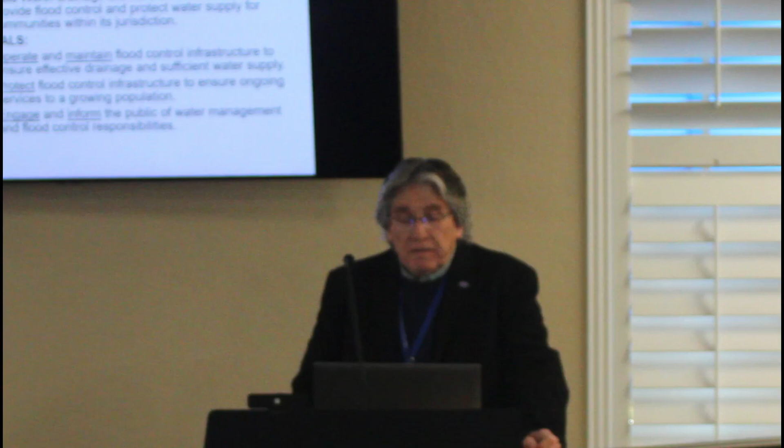In 2024, the state legislature required special districts to establish goals and performance objectives, and the board adopted these goals and objectives in October 2024. An annual report is required to be published on the district's website by December 1 of each year. Our first one will be this year, this coming December.

Our mission is pretty simple. We're a single-purpose drainage district, and the core mission is to provide flood control and protect the water supply for communities within its jurisdiction. Our goals are to operate and maintain flood control infrastructure and ensure effective drainage and sufficient water supply. We protect flood control infrastructure to ensure ongoing services to a growing population, and engage and inform the public of water management and flood control responsibilities.

The outline of this presentation: we're going to talk about weather and water management over the last year, key capital projects, and we've got some pretty significant capital projects that have been going on for a while we're going to discuss, including the canal rehabilitation program. We also have our normal maintenance activities, which is a job in and of itself that is very significant, plus a regulatory program and administrative functions.

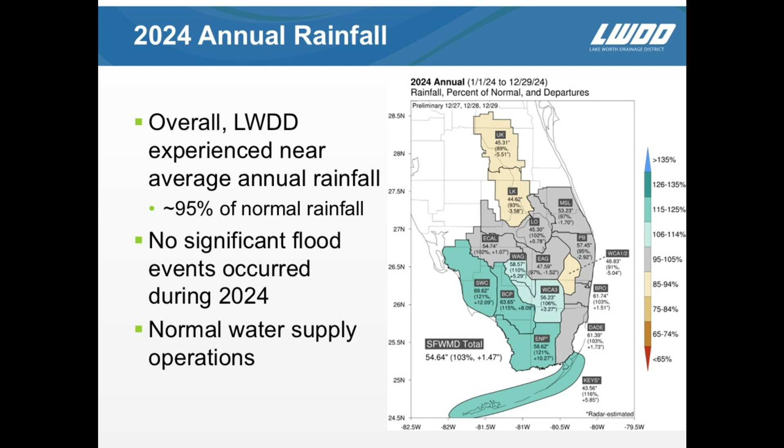With regard to weather, overall Lake Worth Drainage District experienced near average annual rainfall. We got about 95% of our normal rainfall, about 57 inches, which averages around 60. No significant flood events occurred. We had some close calls, but we were lucky this year. We pretty much had normal water supply operations, but that looks like it's going to change, and I'll talk to you about that in a little bit.

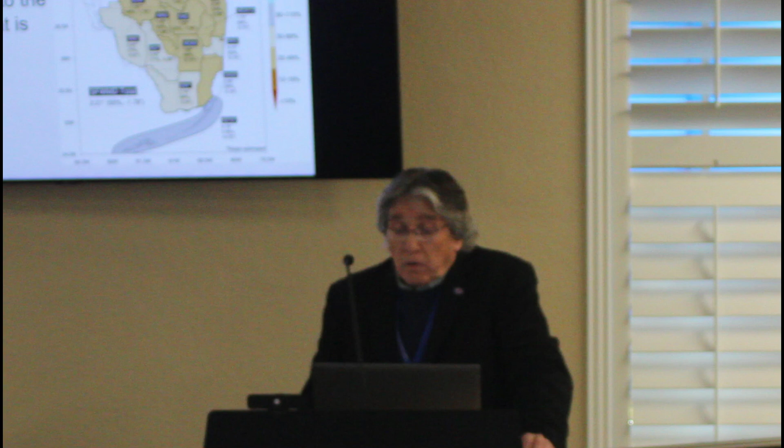In the fall of 2024, we experienced significantly below average rainfall, and this is likely due to the La Nina event occurring out in the equatorial Pacific that has an effect on dry season weather here in South Florida. So far we're probably at 30% of average rainfall, and that's left us in a situation where we're on the edge of a drought.

This is the U.S. Drought Monitor published by the National Oceanic and Atmospheric Administration. It pretty much has the whole state under abnormally dry conditions, with a couple of spots in the Panhandle in North Florida that are in a moderate drought. We expect that may continue, if not worsen, as we move forward.

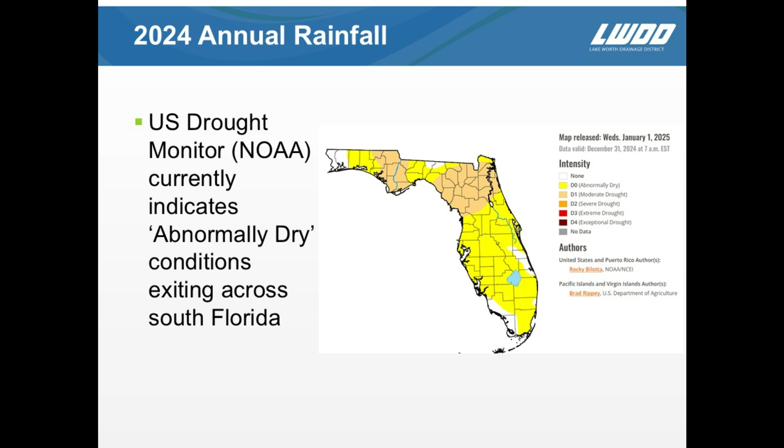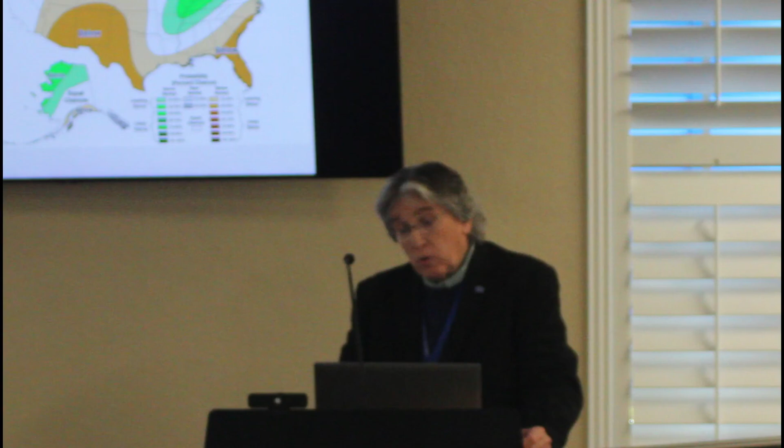The reason for that is when you look at the projections for this La Nina event that we're in, it's anticipated we're going to see significantly below average rainfall as we move into the spring of 2025. So it's not likely to get better than the current condition, and it's probably more likely it's going to get worse. I show this just to give you a sense of what we've done water-wise over the year.

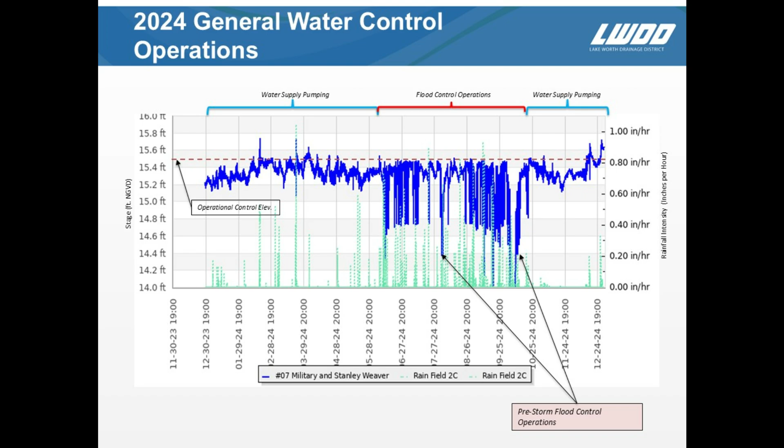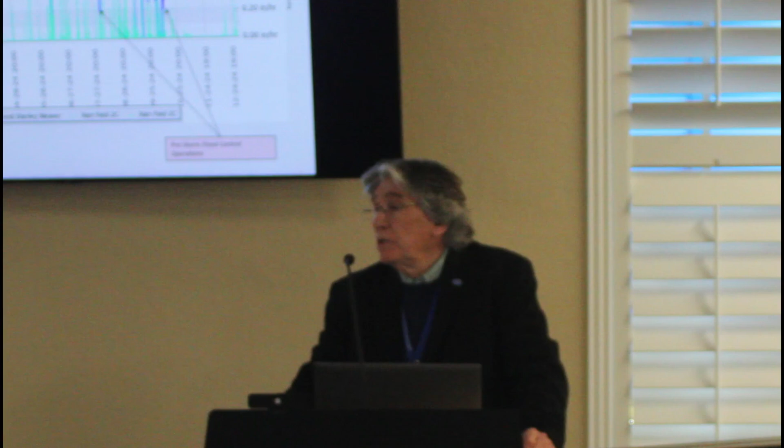We had a couple of pre-storm drawdowns. I'll talk about one of those in a few minutes, in anticipation of the storm, kind of bringing the system down to increase storage. Then when the rain stopped, around the beginning-middle of October, we went back to pumping operations. Because of this indication that it's going to get dry and may get drier, we've been pushing a little harder to push water levels above what our normal control elevation is.

Obviously, Lake Okeechobee plays a big part in our dry season operations. As we've talked about for the past 3 years, the new regulation schedule for Lake Okeechobee is now official and in place. The colonel, or the general, in Atlanta signed it about the middle part of last year, and the Corps of Engineers is currently operating under that schedule.

The current stage is around 14.93 NGVD. That's a great place to be at the end of the wet season as you prepare for the upcoming dry season. The problem is it's been high for several years. The Corps of Engineers has been concerned that that's going to have impacts to lake littoral zone vegetation, and they've initiated what they call a recovery protocol, which is intended to push water out of the lake in the dry season in order to bring the lake down quickly before the spawning season in the estuaries.

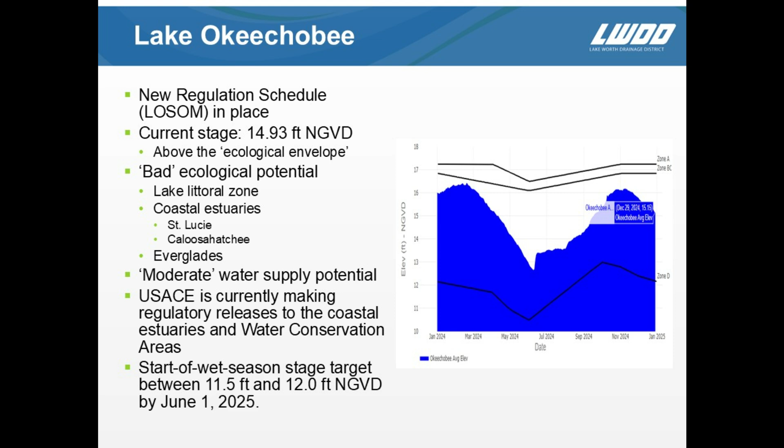Because when you let the water out of the lake, it goes into the estuaries and impacts those coastal ecosystems. So they want to get that done early so that when the spring recruitment for fisheries and oysters and things like that happens, they can stop those releases.

Problem is, their goal is to bring the lake down to between 11.5 and 12.0 feet NGVD. At 10 feet NGVD, you can no longer get water out of the lake. So if they stop at 11.5, they've got 1.5 feet before we literally run out of water from Lake Okeechobee. So it's kind of a precarious spot.

If we're lucky and rain starts on June 1, maybe it's not a problem. But it's a bit of rolling the dice, I guess I'd call it, with the risk that if the dry season extends further into June or maybe July, we might have a problem with water from Lake Okeechobee.

Now we'll talk about Hurricane Milton, which was probably our closest call this year for a major rain event. Early forecasts predicted significant rainfall, maybe even a historic rain event. And there were areas in the state that did get historic rain from Milton, as well as other parts of the country.

We initiated a pre-storm canal drawdown on October 3rd and authorized the communities that had operable structures that they could open those structures in advance of the storm.

We maintain canal elevations, as I showed you earlier, at or below the design operational stage. We maintain canal elevations through the storm to avoid submergence impacts to the communities. In other words, if the water's too high, communities can't get water out of their lake system.

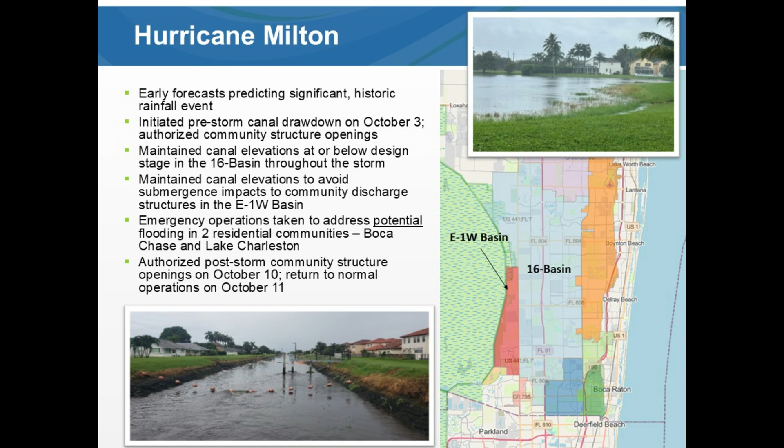And we authorized post-storm community structure openings on October 10th to discharge any of the water that we got from the rain event, once the storm had passed.

I'm not going to go into detail on this, but last year we unveiled our water management dashboard, and this is from our SCADA system and from all our remote monitors, remote rain gauges. We now have a way to look in real time at what's going on in the system.

And for events like Milton, it's a great way to forensically look back at what we did and say, well, did we do a good job? Could we do something better?

Without going into detail, these little bumps here are rainfall for each day during Milton. These blue lines are the normal operating range. These series of lines here are all water levels in the 16 basin, and basically it showed we never went above our control elevation as we went through the storm.

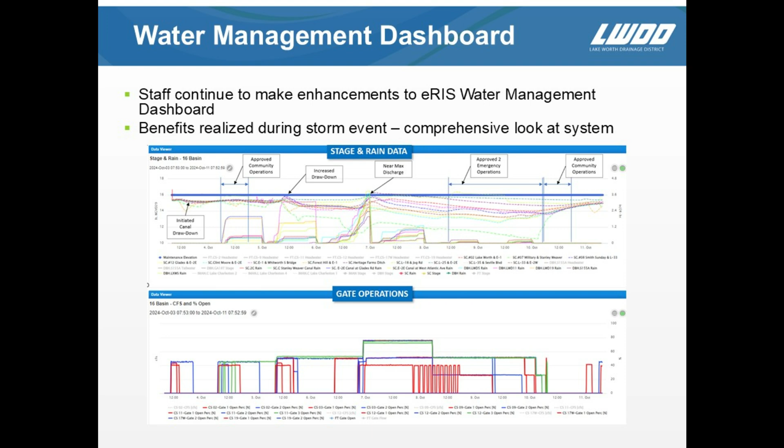And we can kind of say, well, what were we doing when the communities were discharging? What were we doing at the peak of the storm? And these traces down here are the actual gate openings. Each individual gate we can trace exactly when it opened, how long it stayed open, how wide it was open, how much water was flowing through it, and when it closed.

So this is a great tool we use in real time, and we can use after the storm to explain to people what we did, how we did it, and why we did it.

We had another milestone this last year, and that was the C51 Phase 1 reservoir became operational. And we received the first request to pass water from a reservoir out there on 20 Mile Bend into the C51.

We picked it up from the C51, pushed it through our system down to the Hillsborough Canal, where Broward County could pump water from the Hillsborough into their canal system to meet that need.

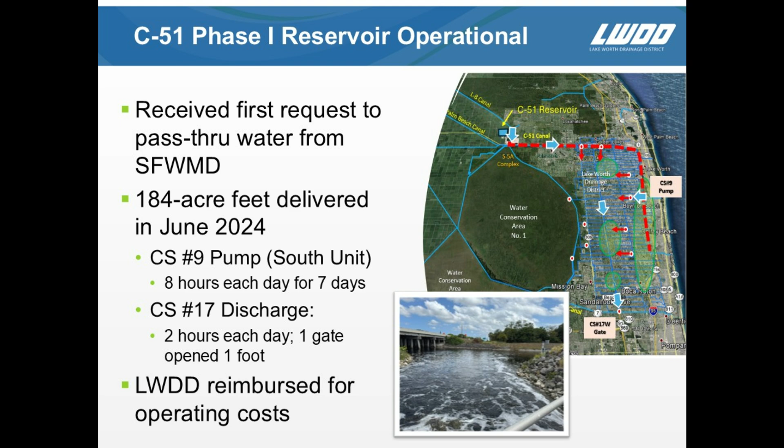So we pumped in around 184 acre-feet, which wasn't a lot. It's Control 9. We did it 8 hours a day for 7 days, and then we discharged it at Control Structure 17, 2 hours a day. We had one gate open 1 foot, and that's the water coming out of the gate.

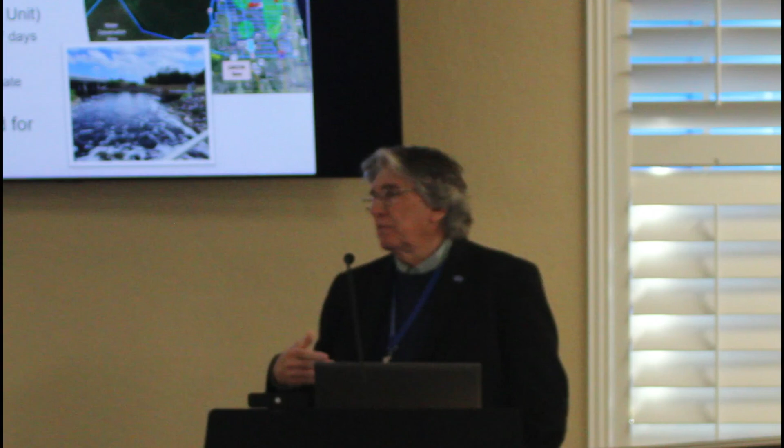So it wasn't a lot of water, but it was important, because this agency worked with the Water Management District for the better part of 20 years implementing this system. We played a critical part in moving water from one point to the other, and this was the first time that it actually did its job.

The other thing we've been working on, and we're almost done, is the completion of our comprehensive hydrologic modeling effort. Basically, this map is a very complicated way of saying we model the entire water movement structure within our district.

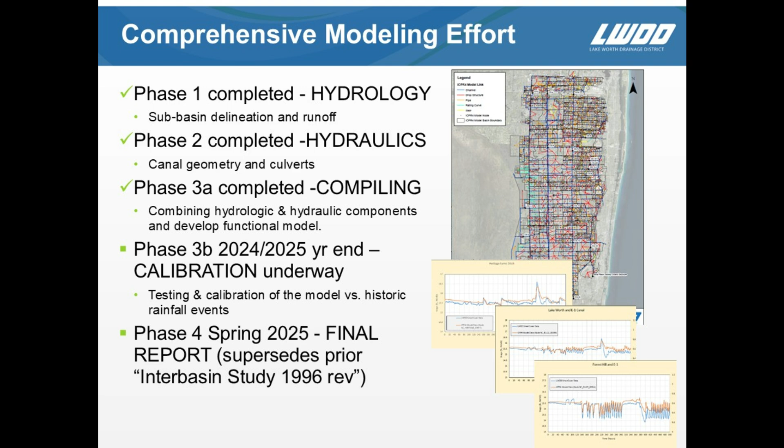We completed the hydrology in phase 1, hydraulics in phase 2. We compiled it so now there's a functional hydrologic model, and we're finishing up the calibration, which proves the model represents what actually happens in the real world. The goal is this spring we issue a final report that will supersede the previous study, which is now 30 years old. We'll have a state-of-the-art interbasin study to use as we're permitting, regulating, and operating the future of this system.

Another big milestone we've talked about for the better part of a decade: refurbishment of Control Structure 9. We were going to replace it, but the cost got too crazy, so we decided to do a major refurbishment instead. That's taken a series of years, and the last step was to replace the radial gates you see in the photograph, which we did in January of 2024.

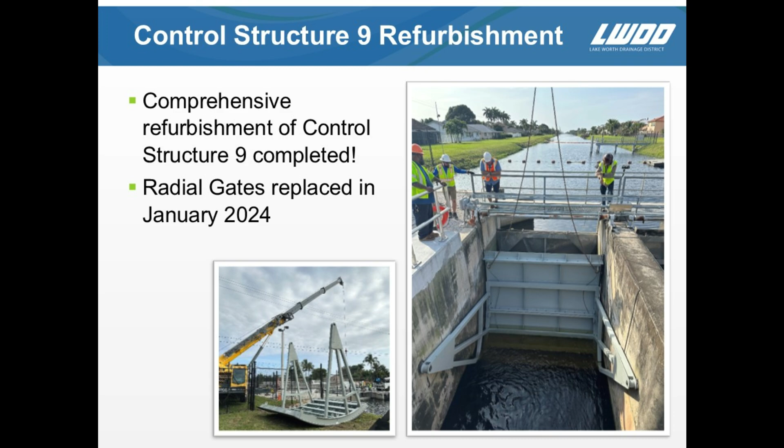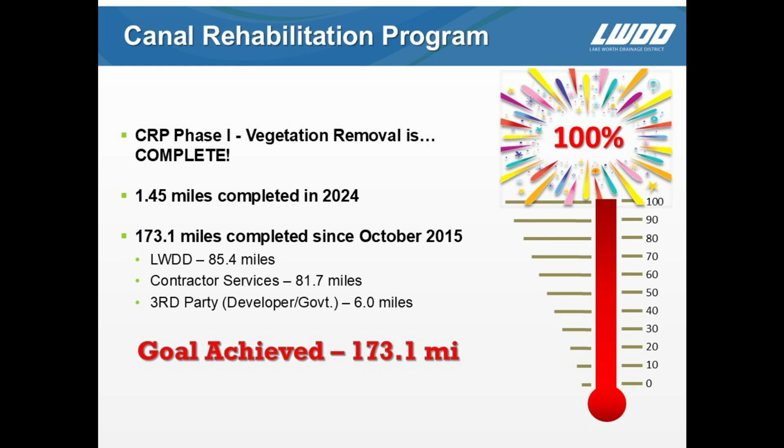Remember the presentation I gave back in 2015? I estimated it would take 20 years to do it, and we did it in half the time, thanks to the board for funding contractor services to help us double that effort. Now we're safe from having trees falling and collapsing from our property into our canals and impacting flow.

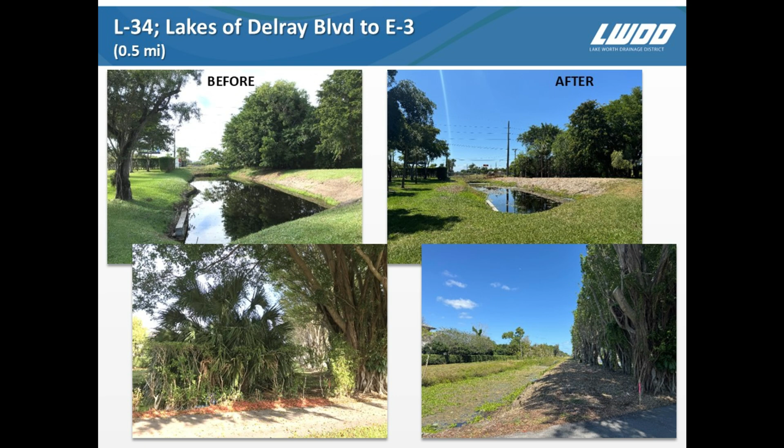Here are some before and afters. This is Lakes of Delray, L34. You can see before, we had heavy vegetation that was threatening - if a wind came, that tree could fall over and block the canal. That's been cleaned, slopes have been dressed. Similar situation here, you can see the stake is our boundary line, so we'll clean that up.

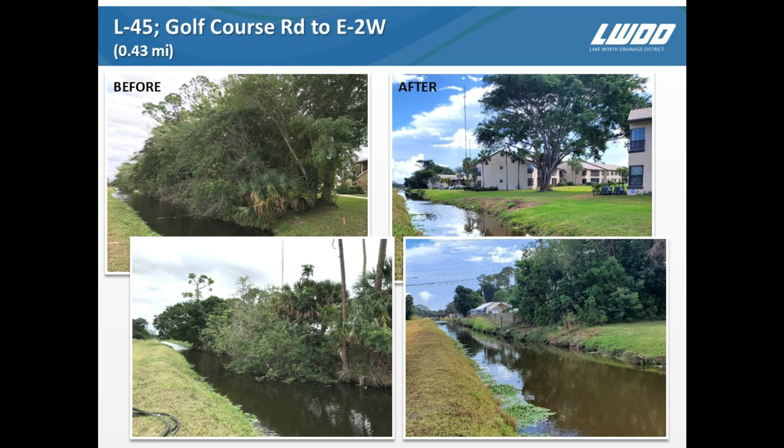This is L45, similar situation - one bank was just totally overgrown. Now that's clear. We're getting ready to address these canal slopes and reconstruct the design section. This was next to the Pine Jog Environmental Center, which we've talked a lot about. We had a berm there that we had to remove, but first we had to get the vegetation down.

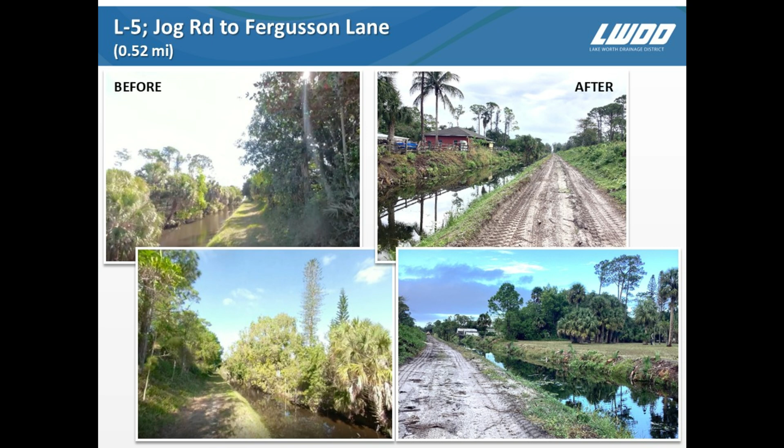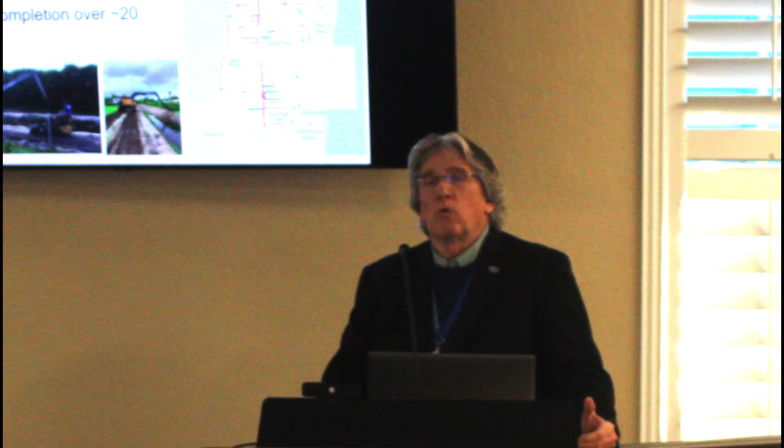That's been completed. So now we focus on the maintenance restoration program, called the MRP. Some people refer to it as CRP Phase 2. Basically, now that we've got the trees out of the way, we've got to restore the canal bank and restore the canal section.

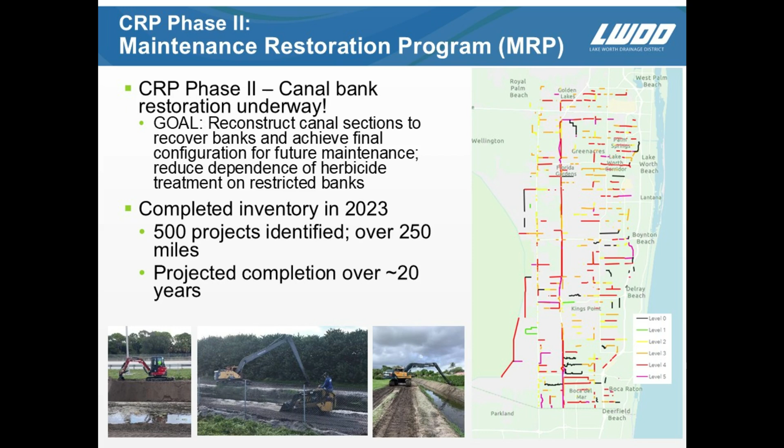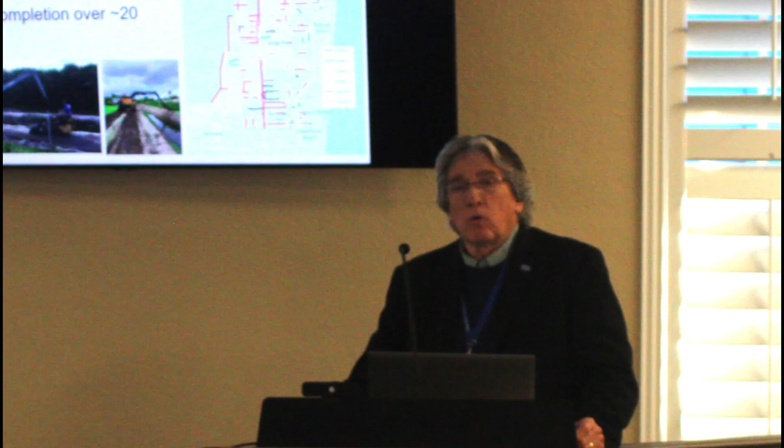We completed the inventory in 2023. We've identified 500 projects encompassing about 250 miles, and we expect this project will take 20 years because it's slow and laborious - you've got a big machine, you move a lot of dirt, and it takes a fair amount of time.

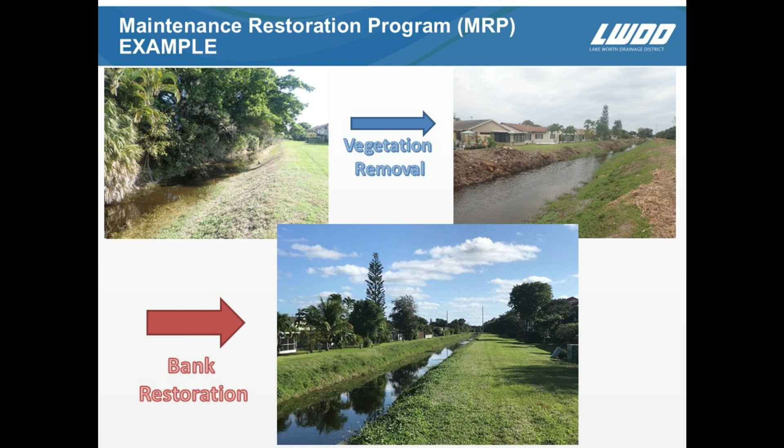To give you an example, this is 10 years ago. The canals looked like this, where one side was completely inaccessible and the risk of trees falling in the canal was pretty high. We went through the CRP, removed that vegetation, and it looked like this afterwards - but still, the canal banks are eroded and the channels are in bad shape. The next step, bank restoration, is to come in and dress it up to look like the canals that were intended in 1915 when the system was conceptualized.

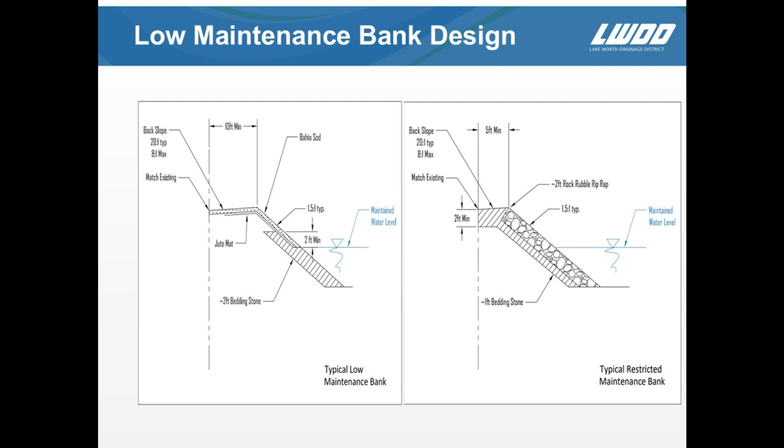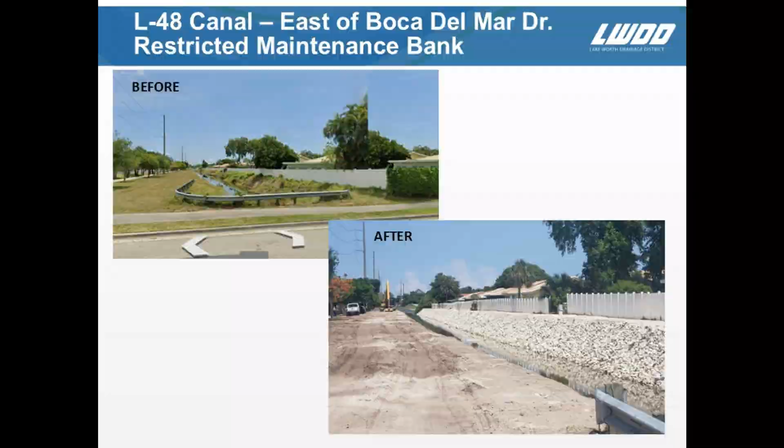We have a timeline. Tony Lacasas has come up with the outline of a program - these are the first few projects we're going to do. But again, this goes out to 2045 for ultimate completion. So it's a big job, and it's going to take a while.

Well, we cleared the low maintenance side, right? They don't have trees on them anymore. But we've got to maintain it, otherwise 10 years from now we're going to wake up and it's going to look just like it did in 2015.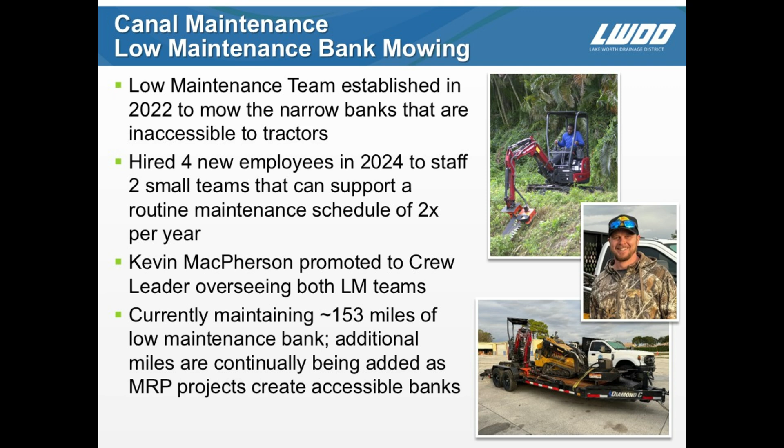So we've established a low-maintenance team to mow the narrow banks, and you need specialized equipment to operate with those narrow land margins. We hired 4 new employees in 2024 to staff 2 small teams that can support routine year-round maintenance, twice a year for each section with regard to vegetation maintenance, etc. Kevin MacPherson has been promoted to crew leader to oversee both of these teams, and they're currently maintaining 153 miles of low maintenance bank, and of course we're adding more and more as we go through these projects.

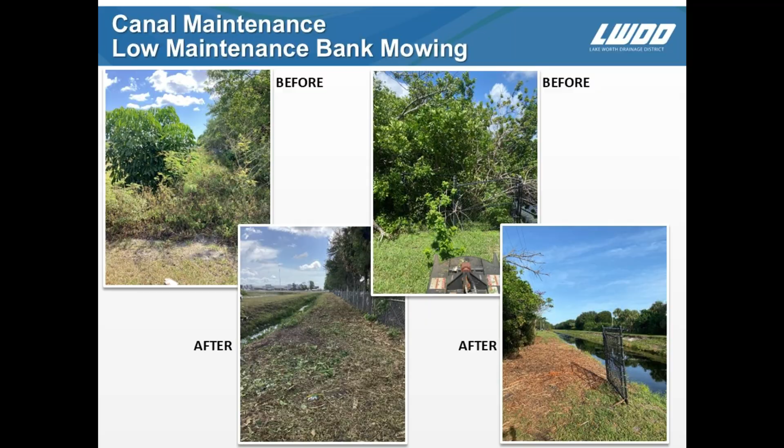Again, focus on the low maintenance side. This is what it looked like before. We used to joke it's really no maintenance side back then, because you couldn't even get there with the trees and everything else that had grown in. But after this program, you can see now it's clear, and you can access it with specialized equipment to keep it mowed and maintained so it doesn't revert back to that heavily vegetated condition.

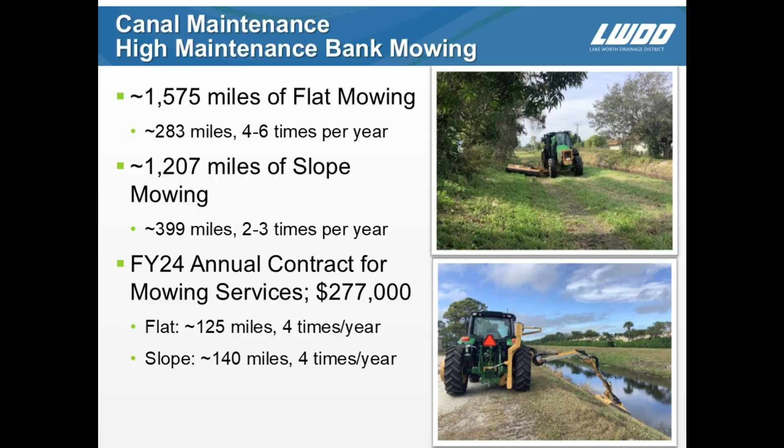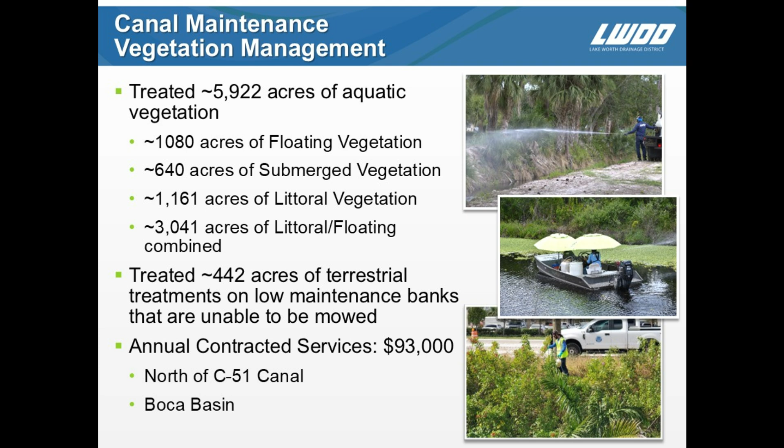Canal vegetation management is important, both aquatic and terrestrial. We treated almost 6,000 acres of aquatic vegetation. About 1,000 of that was floating, 640 acres submerged, which is vegetation that grows on the bottom. We had about 1,100 acres of littoral vegetation and about 3,000 acres of littoral and floating vegetation combined. We treated 400 acres of terrestrial treatment, most of that on low maintenance banks that are unable to be mowed, like I discussed earlier. We had annual contracted services of about $93,000 north of C-51 Canal and in the Boca Basin.

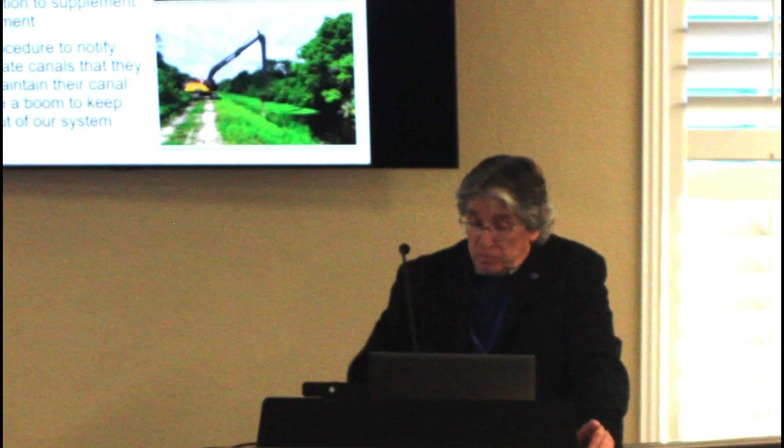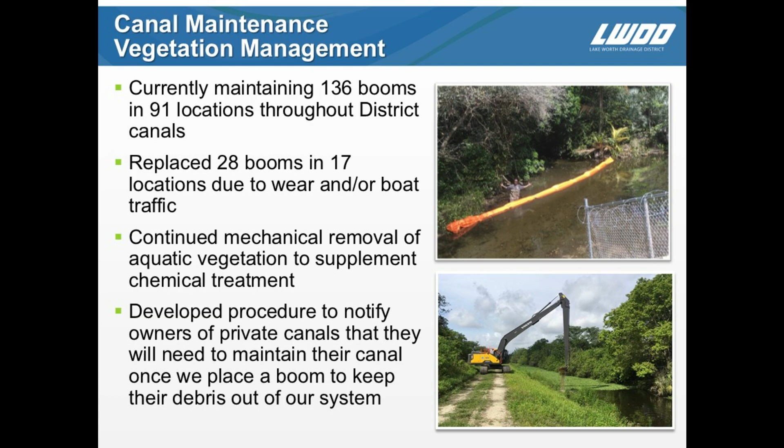We're currently maintaining 136 booms to catch floating vegetation as the wind or water currents blow it around, located in 91 locations. We replaced 28 booms in 17 locations due to wear and tear or boat traffic, since boats kind of run over them. We continued mechanical removal of aquatic vegetation to supplement chemical treatment, and we're developing a procedure to notify owners of private canals that discharge into us that they need to maintain their canal vegetation once we place a boom in. We're trying to keep them from letting their vegetation become our problem.

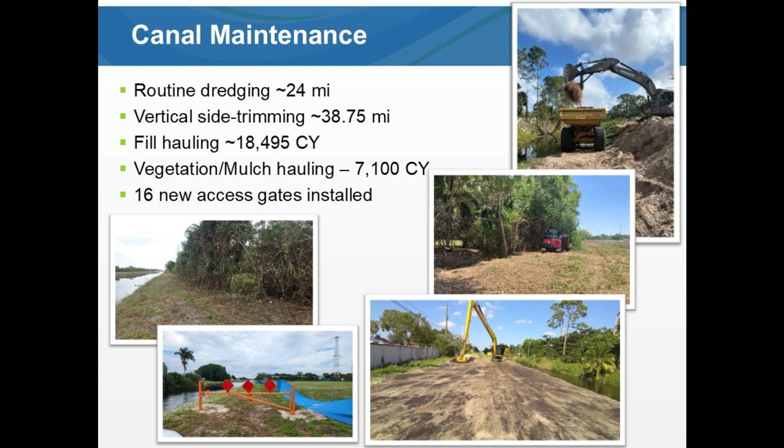We're working with them to treat their vegetation issue before it gets to us and costs us money and effort. With regard to canal maintenance, we do routine dredging, shoal removal, and things like that - about 24 miles this last year. Our tree crew did vertical side trimming, about 38 miles, because we've cleared the vegetation that was on our canal, but now adjacent property owners have vegetation hanging over onto us. So we have to side trim those big trees and other vegetation to reduce the risk of it falling into our right-of-way during a major wind event. We also installed 16 new access gates.

Again, this is the typical canal maintenance tree crew. You can see this vegetation is not on our right-of-way, but it's hanging over from the adjacent property onto us. So we routinely go through and the tree crew side trims those trees to keep them back on their side of the property, and we do that fairly routinely.

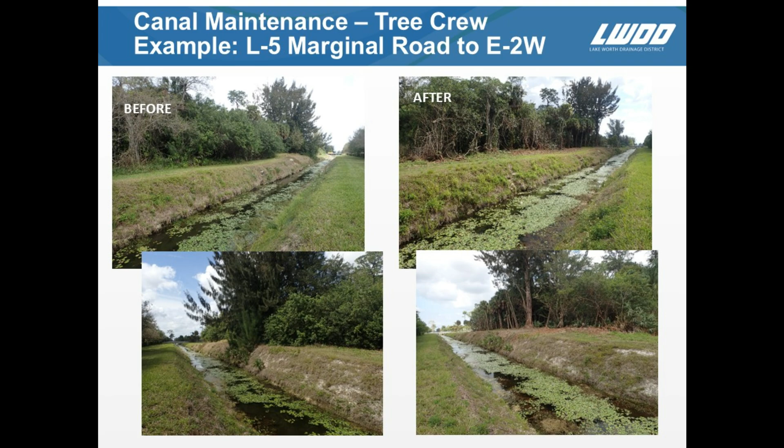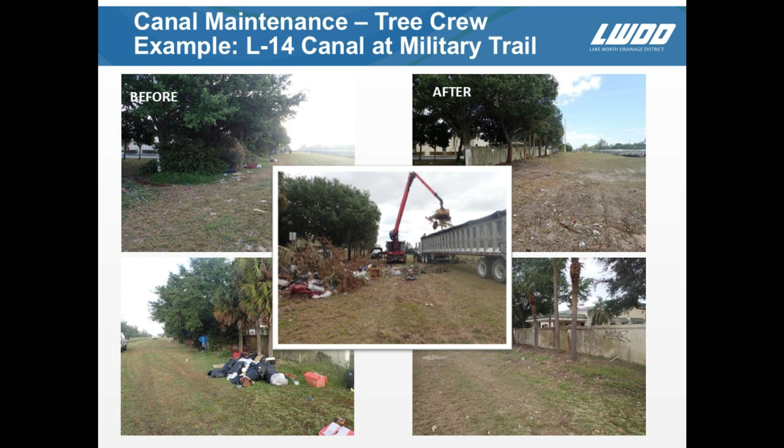Here's another example, Canal L14 and Military Trail. We had some homeless people living in vegetation next to some of this area, but we went in there with the help of the adjacent property owner and cleared vegetation behind the fences, so you can see that issue has been remediated.

And here's another example, L10 west of Jog Road, a similar situation where we had vegetation on a fence line, and with the help of the community next door, we cleaned that up and it's in good shape.

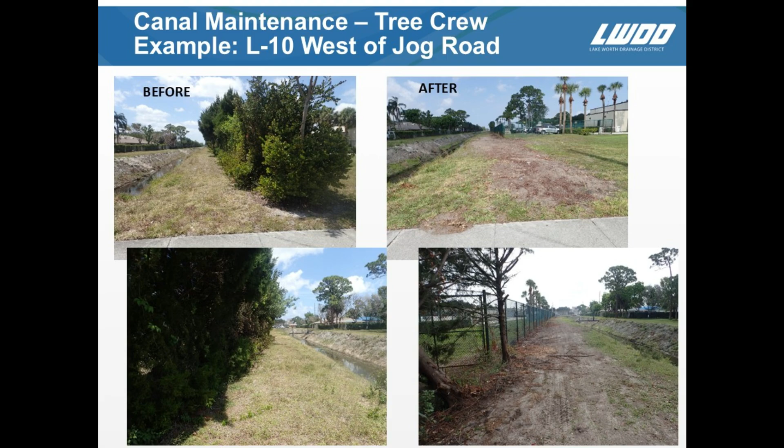Structure maintenance - obviously the control structure is a big part of what we do. It's going to be a bad day if we have to try to open a gate and it doesn't open. So we work 364 days a year keeping the system functional, so that on the one day we need those gates open, they open without question. Part of that now is the SCADA system, our telemetry system that allows us to remotely - middle of the night, weekend, New Year's Eve - open those gates or close them remotely.

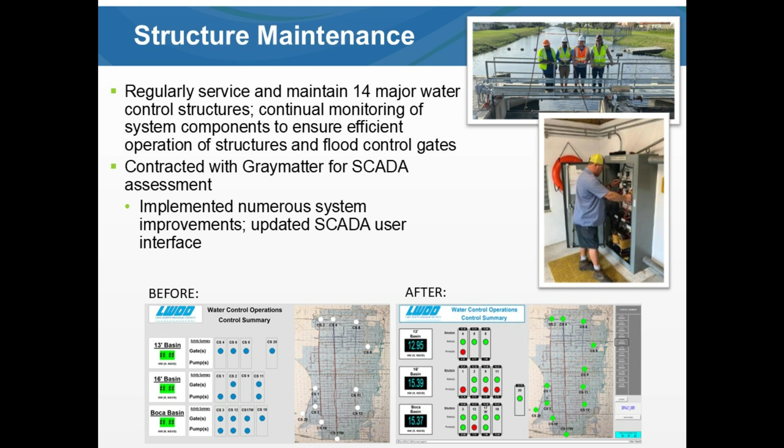We've contracted with Graymatter for an ongoing SCADA assessment, and we've implemented numerous system improvements and updated the SCADA user interface, again, to make sure that thing's ready to roll the minute we need the gates open.

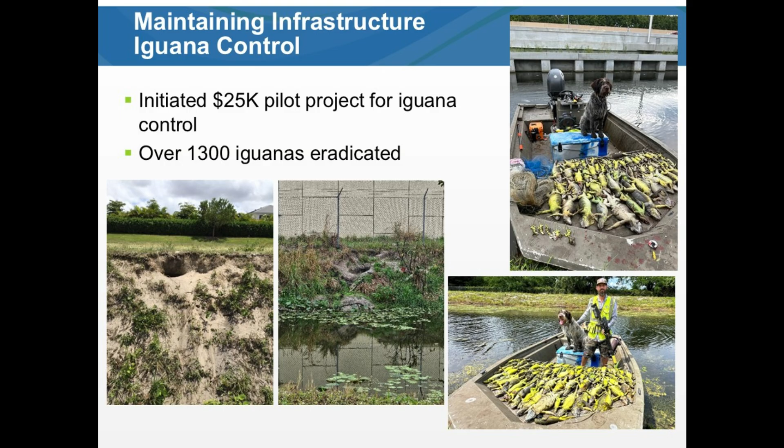This is Reagan's favorite program: maintaining infrastructure, iguana control. We initiated a pilot project for iguana control, because most of the time you see them kind of scurrying around. They don't like to hurt anything, but when they burrow in the side slope of our banks, it's a bad situation. You can imagine a piece of heavy equipment coming across and collapsing as that burrow goes under our right-of-way. It could put the equipment and the personnel operating it in a pretty precarious situation.

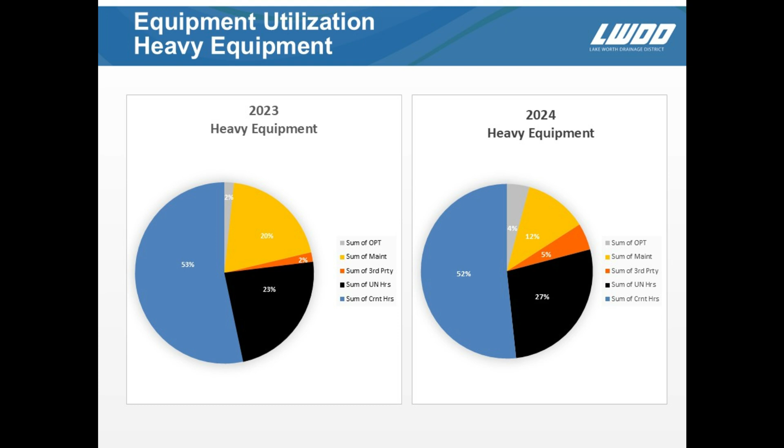Now, with regard to right-of-way regulation, this is the program that deals with people that want to put stuff on our right-of-way. We received 305 new right-of-way permit applications, issued 307 new permits, and issued an additional 143 right-of-way permit modifications, extensions, transfers, and other related letters such as objection, no objection, dewatering, etc. We completed 632 plat and development reviews for county and municipal development projects.

Regarding regulation, we had 3,211 permit compliance deliverables. This map shows all of the existing compliance issues that we currently have. We've got 3,000 deliverables coming due for 1,577 individual permits.

We collected over $16,000 in service agreement fees and $190,000 in annual permit fees.

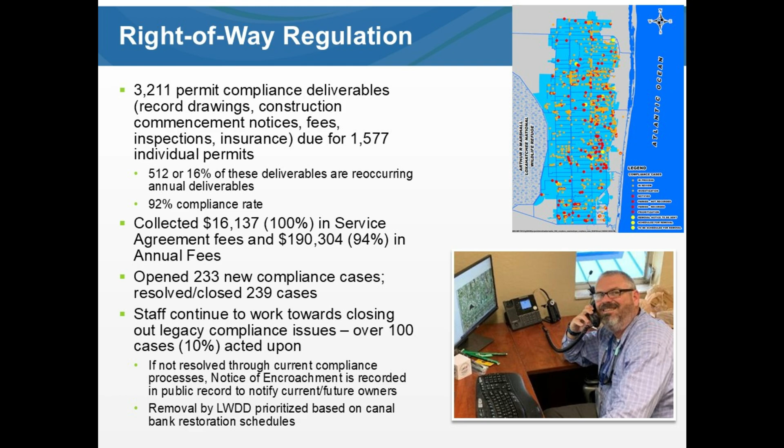We opened 233 new compliance cases and resolved or closed 239, obviously some of those being backlogged. Staff continues to work on closing out the backlog or legacy compliance issues. Over 100 cases have been acted upon. If they're not resolved, in other words, if we can't get the landowner to resolve them, we'll issue a notice of encroachment, which is recorded in the public record to notify current and future owners that that condition exists.

And of course, we can come in and remove those obstructions, but it's based on our availability and is prioritized based on the canal restoration schedules I mentioned earlier.

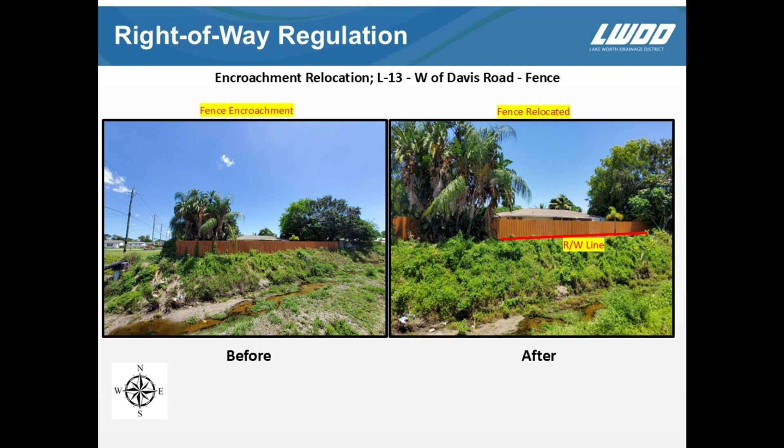This was one that's been around for decades. This is Turnpike, Delray Lakes Estates, the E2W Canal west of the Turnpike, south of Atlantic Boulevard. Years ago, when the district was cleaning out this canal, we put the spoil material on our right-of-way to use it in future canal remediation.

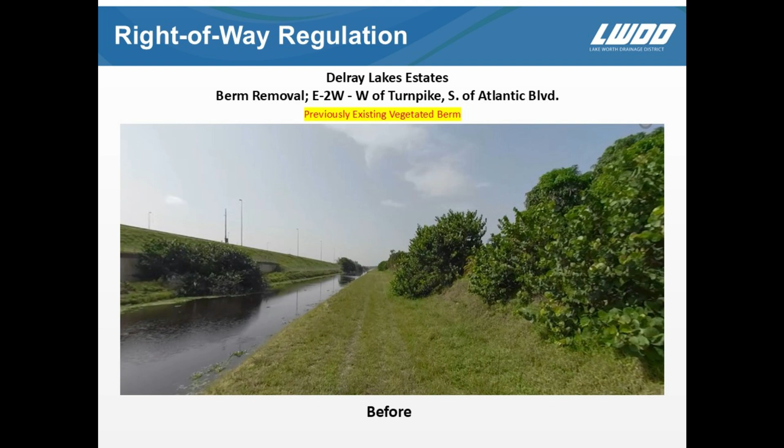Subsequent to that, either through natural recruitment or some of the adjacent property owners planting vegetation on it, it became kind of a sound barrier, a visual buffer to the turnpike that everybody in the community got used to over 20 or 30 years. So when we decided, okay, we're taking the vegetation down, we're taking the dirt, we're going to do some of the work that Tony needs to do to rehabilitate the canals, we didn't get a great reaction from the community. To their credit, they got together, recognizing that we needed to utilize our right-of-way and that material that we'd stockpiled there for our purposes, and that they were going to need to come together as a community and deal with the buffer situation.

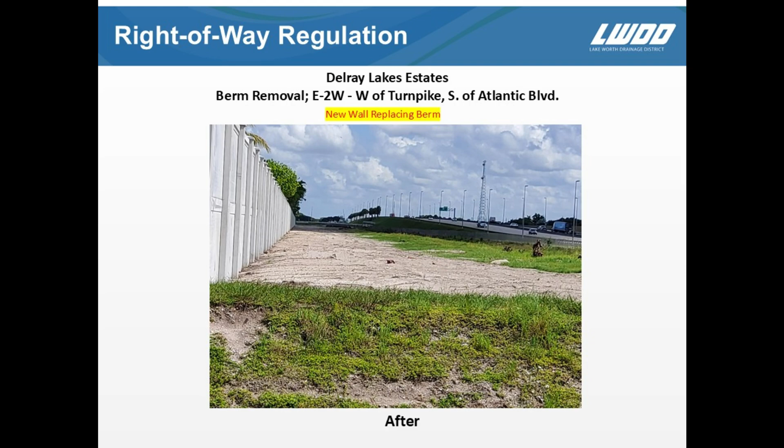So, again, after a lot of coordination with the community, we removed the material and recovered access to that right-of-way. After that was done, they came through and built a noise or visual barrier, because you never could get a commitment from the turnpike to do it. So they took it upon themselves to do it. To me, end of the day, it's a win-win. They got the protection they need and deserve and were willing to implement, and we got the function of our right-of-way back. So that's kind of how it should be done.

This is a temple on L50, near Canary Palm Drive. Before, they had a fence that was buried in there, and there was a lot of vegetation. We couldn't get access to the canal.

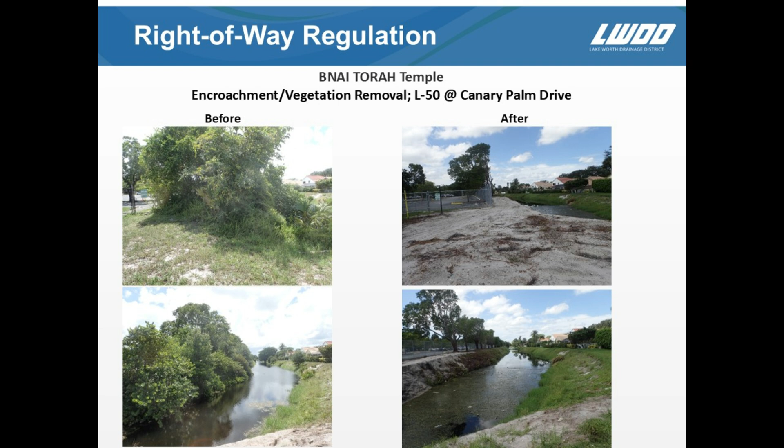But again, working with the temple representatives, we were able to come in and clear this out. And now they've got a cleaner situation, and we've got a canal that we can maintain.

With regard to technological tools that we rely on, one of them is Geographic Information Systems, or GIS. As you've seen from the maps we've shown you earlier, we've tried to put all of our information in a spatial format so we can look at it on a map.

One of the things you need to do is have a historical aerial perspective so we can say, well, we know what the land looks like now. There's the airport, 2024. What did it look like in 1940?

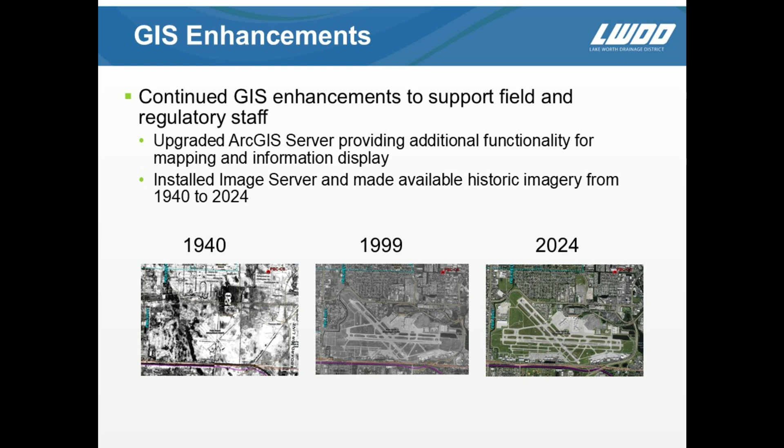And then how did it get from 1940 to 2024, with all the intervening years in between? We now have a pictorial reference embedded in our GIS system that we can look at to see the evolution of development within the district at specific locations.

Public records and information. In this age, it's a big deal. We continue our public presence at community meetings and outreach with homeowners associations through websites and newsletters.

We hosted our 10th annual flood control workshop, where we meet with homeowner association representatives, property managers, and the public to explain how we do what we do and how they fit into that.

We addressed over 1,000 inquiries from the public during storm events, after storm events, etc.

We completed the district records retention plan. We've been spending the last 10 years or longer digitizing old records that have been around this agency for 100 years, getting them into a digital format.

Now we have to make sure they're organized in a form that everybody can get to and that we can effectively utilize, and that includes a memo you write today.

That initiated this reorganization of electronic records to meet those business needs. We scanned 22,718 documents and disposed of 40 cubic feet of records, reclaiming a lot of square footage in this building. We now have space for people and meetings and other things we didn't have before because we were storing physical documents.

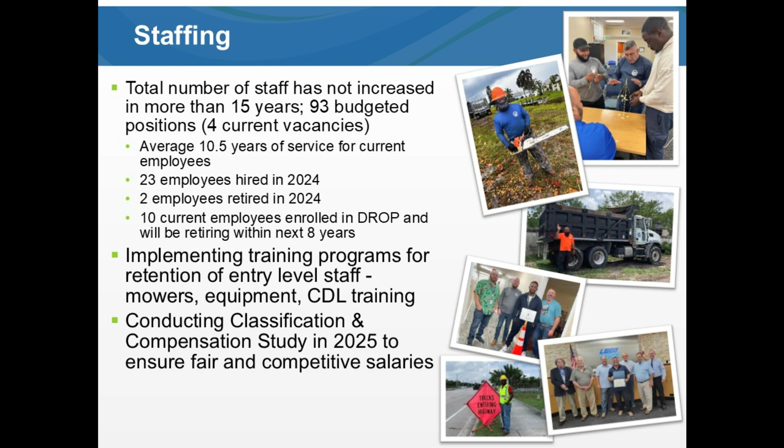Tony has been leading the charge on working out a cooperative training program so we can give our staff access to CDL training to get licensed, so they can move up through the ranks, through the different difficulty levels from mowing to heavy equipment.

We're conducting classification compensation studies in 2025 to make sure that our positions and employees are compensated fairly, comparing them to counties, cities, water management districts, and other entities.

With regard to financial highlights, the auditors issued an unqualified opinion for 2023. Financial records and statements are fairly and appropriately stated in accordance with generally accepted accounting principles.

And we adopted a 2025 budget of $17.3 million with a decrease in annual assessment. I don't know the last time that was done, but it's been a long time.

Not very many agencies around the state have done that. It wasn't a huge assessment—we reduced the non-ad valorem annual assessment by $1, from $49.50 to $48.50. But it reflects the district's ongoing commitment to maintaining and improving infrastructure while responsibly considering the financial implications to landowners.

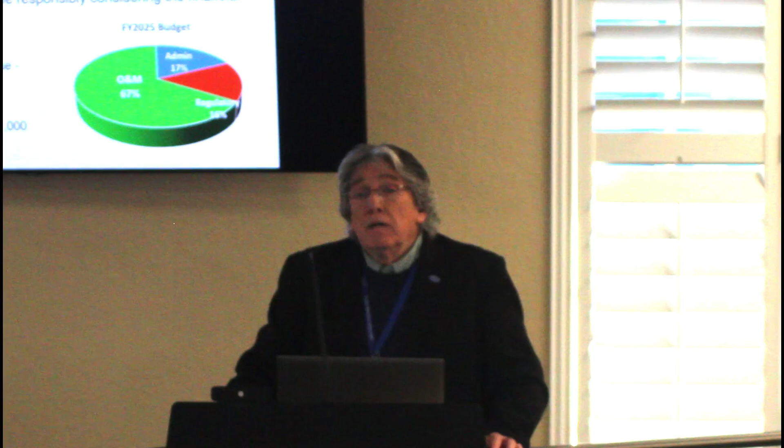With regard to other revenues, we received permit fees of over $1 million, and our earned interest change in value was $1.4 million. Quit claim deeds brought in $2,000, the tower lease brought in $131,000, and the sale of surplus equipment brought in about $64,000.

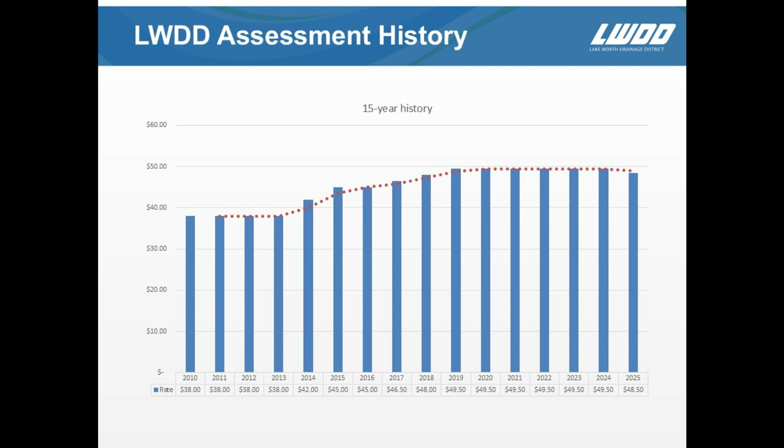So this looks at the assessment. You can see this has been our history back from 2010, and in 2014 when Bob and I got here, it went up a little bit. We were trying to fund these programs I've been talking about, refurbishment, Control 9, the CRP program, everything. It held us steady, and now we've been able to reduce that somewhat, and we'll continue to have an eye open for those kinds of opportunities with regard to the assessment in the future.

Looking ahead to 2025 and beyond, CRP Phase 2, that maintenance restoration program, is going to be a high priority. The restoration of low-maintenance canal banks and our canal sections, management of existing structural encroachments on the right-of-way to get things out of our way, and addressing those legacy compliance issues and cleaning up encumbrances that have been around for a long time. We have ongoing capital projects for refurbishment of water control infrastructure.

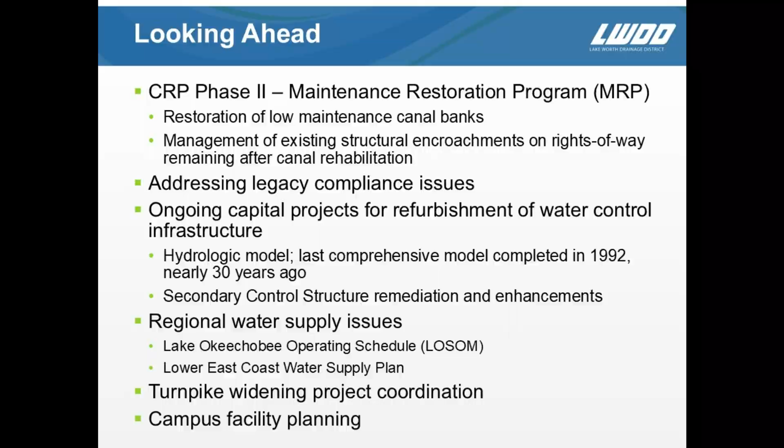And then, of course, campus facility planning. We're looking at the possibility of another structure on the campus. It's real preliminary, but we'll bring that back to the board this year.

So with that, our recommendation is that the annual report to landowners provides an overview of the district's annual activities, including activities undertaken in furtherance of the adopted water control plan. We recommend acceptance of the report pursuant to Florida Statutes, Chapter 298.26.